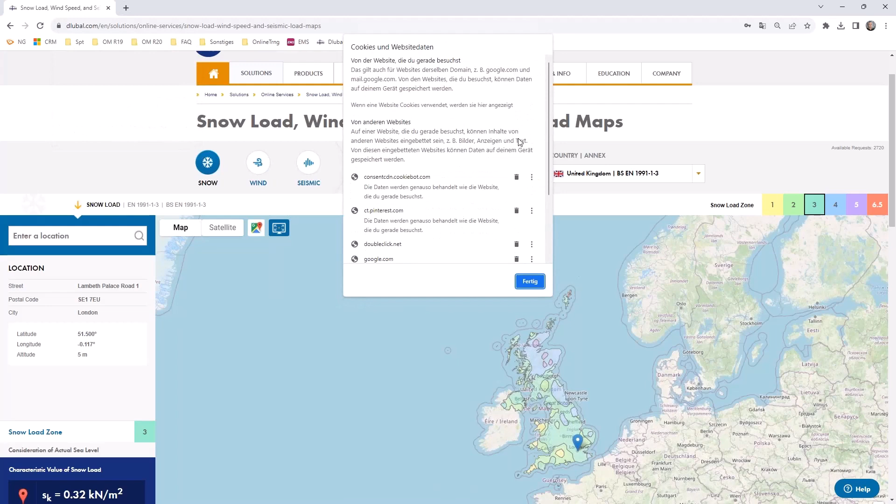This is data saved on the computer to quickly access a page, but it might be necessary to reload it. You can select to allow all cookies again, and then the frame should load again if it did not before.

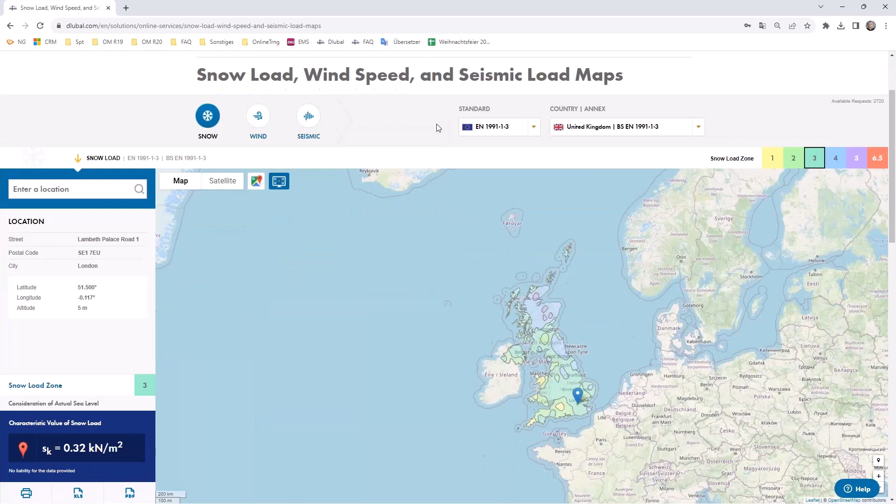Let me quickly sign in so I have enough requests for today, and let's go again to the snow load map. I think you're already coming to it. It is not available yet for every map - I do not think it's available for Great Britain. Oh, it is already. In my tests, it was not available.

We can use, for example, Great Britain with EN 1991-1-4. You see the small button on the left bottom of the page, which is still announced as being a beta. Please double check the values if they are correct, or do that in RFEM, or at least be suspicious if they might be correct. It's still in beta mode, but we do not want to not present it, so you can think about using them.

If you once click on the button, you can already see the three diagrams you can now gain. It's not only about the basic wind speed - you directly jump into the map and parameters according to the Eurocode, and it will create the diagram over a certain structure height.

If you would adjust to over 20 meters in here, you would see that the diagram will be adjusted, and you can also jump into the wind profile tab in order to copy paste the values with the level.

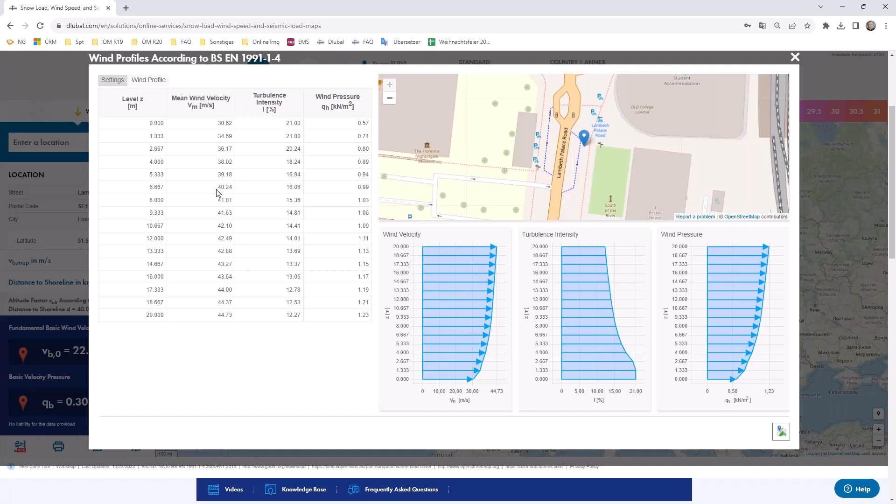This is then necessary if you jump into the RWIND main program, by the definition of the wind profile and turbulence intensity profile. You can also choose a user-defined definition and adjust all the values you see in here. You also get a closer look at the place where you are.

You can also switch off the map if you rather want only a big display of the diagrams. Just to remind you again, it's still in a beta phase, so it might not be available for every standard we provide, but this might be quite useful if you use RWIND without RFEM 6, or if you want to compare your hand calculations, or compare our calculations and tell us if something might be wrong or not.

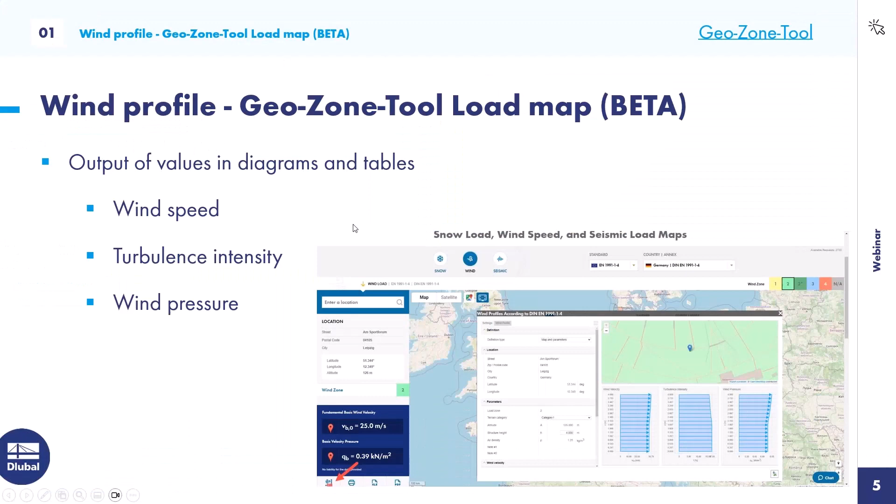So this was something not directly linked to RWIND. Let's now jump into the main part, of course, our program RWIND. This is my summary of the 4 features I would like to mention.

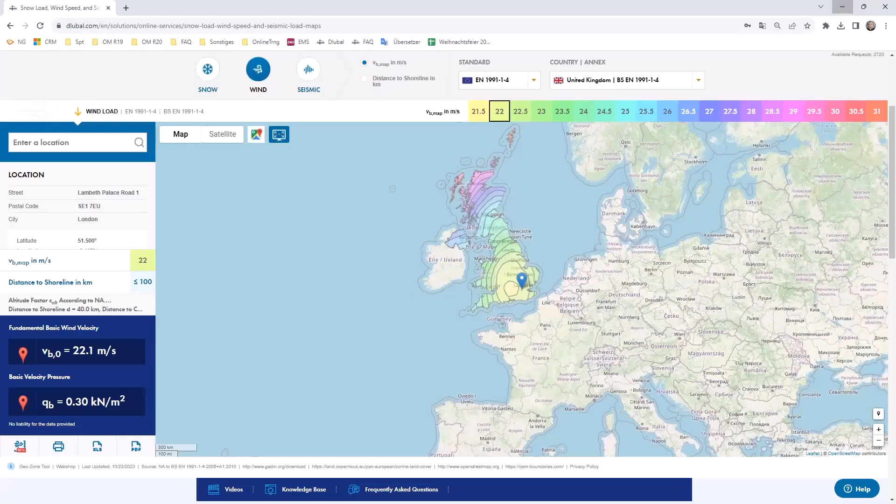What I would like to talk about now is the first feature: the generation of zones from RFEM surface numbers. The next one will be support for verification or experimental data - this will be the main part of today's webinar. The next is a new scaling function for the wind tunnel optimization, and last but not least, we will quickly step into the display of maximum and minimum values in each time step.

I have one slide for each feature, and then we jump into a small file in order to check where you can find it. So you are now able to generate zones directly from RFEM surface numbers.

Of course, only if you use RFEM 6 and then hand over the model to RWIND. We will now also hand over the surface numbering, and then you are able, in the edit part of RWIND, to generate zones from surface numbers.

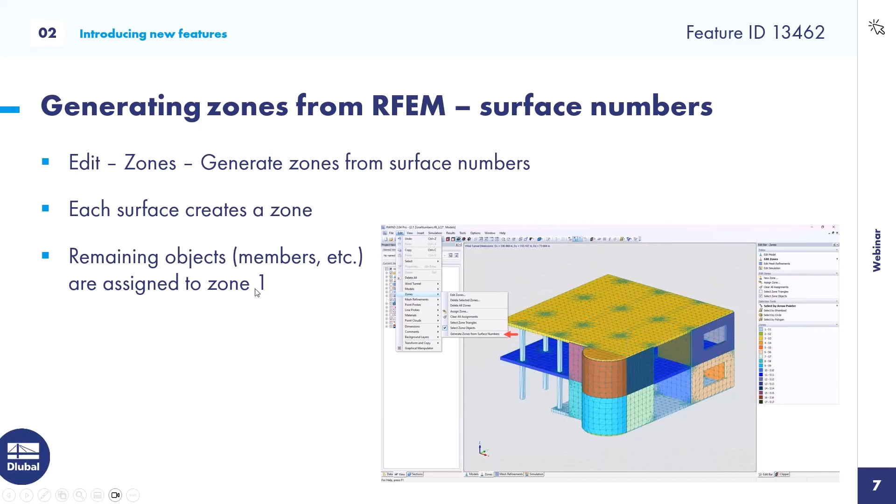So each surface you can of course split as much as you want in the RFEM main model will create a zone, and remaining objects - so you may also hand over members, they will also have triangles - will be assigned to zone 1. So that's a bit of a complication, that they are assigned to zone 1.

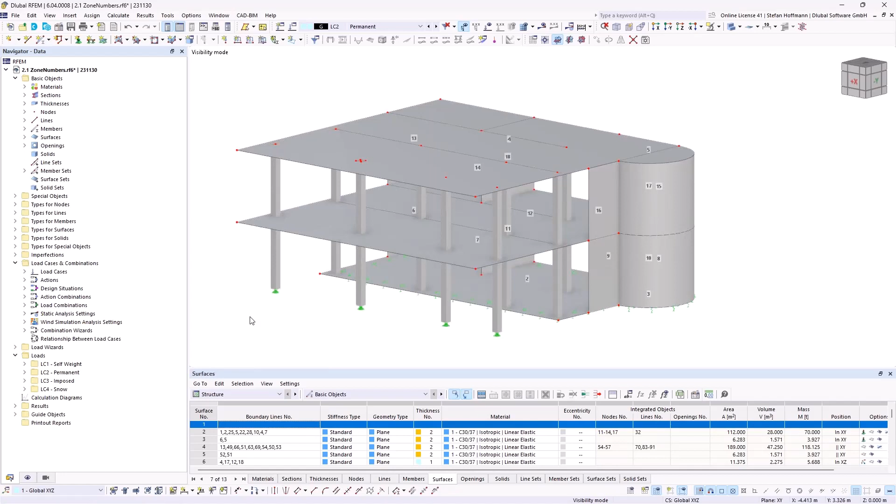But if we now step into my example file, which is also installed, it's the concrete building where I switched on the surface numbers. You can see that we have surface number 1. If you do not want surface 1 to also include the member triangles, you just have to go into the table and insert a row, so the surfaces will not start with 1, and everything else should be synchronized in the back. Now we have surface numbers starting at 2, and all other stuff may be handed over to zone 1. If this is not fine enough for your difference, we will see it later in the main example - you might also right-click and divide surfaces with intersecting lines to create multiple zones.

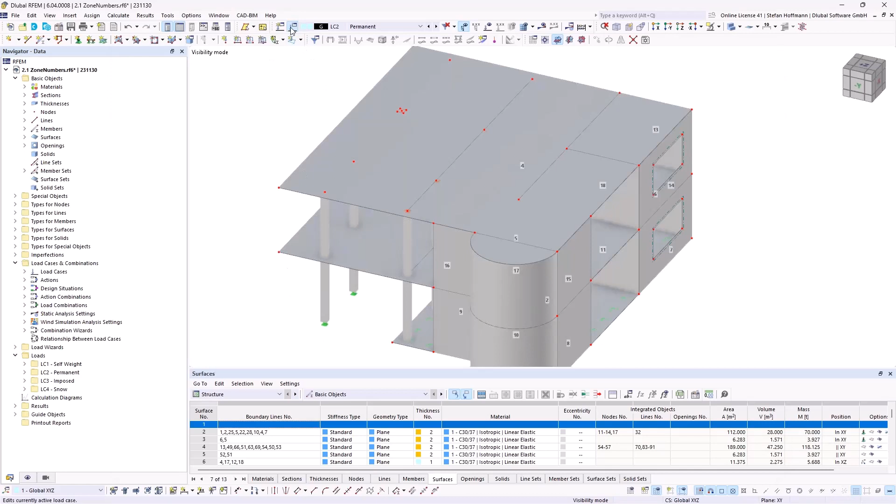So let's quickly create an example wind simulation load case. We will not care about any settings, what are available or necessary to be taken. We will just open our model in RWIND, which can be quickly done by the button I used. So our geometry is handed over, and now there would be only one default zone.

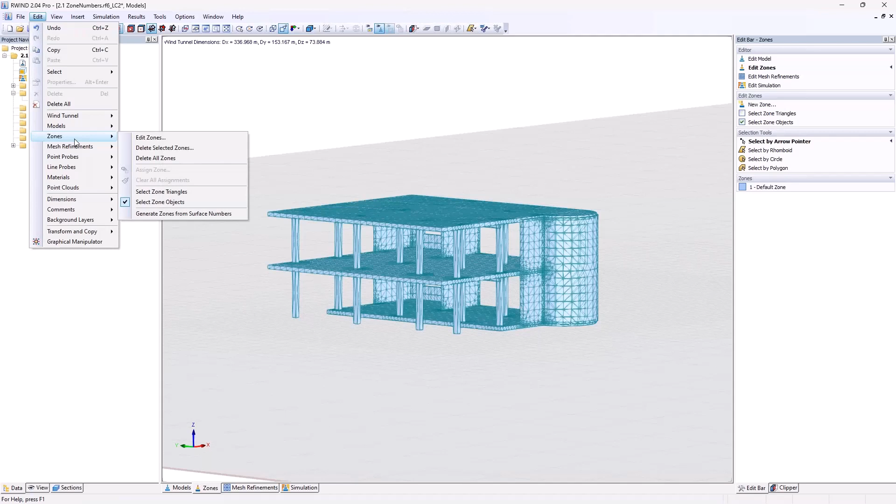So it is possible for you now to hit Edit, Zones, and generate zones from surface numbers. You quickly see that there are now a lot of zones created, and you do not have to do that manually - you don't have to create a new zone and use the selection tools to gather all the triangles which might be necessary for your file.

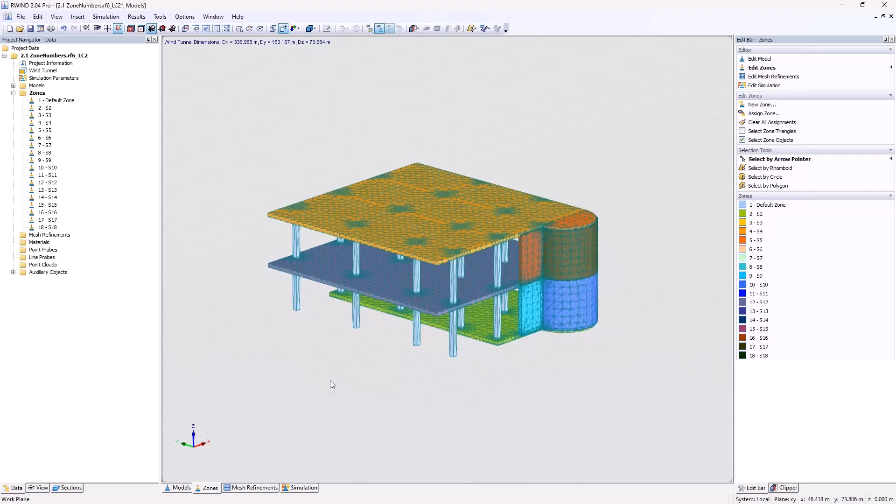If you already consider the surface numbers or a certain division in RFEM 6, you can already directly create these zones in order to quickly evaluate, maybe, normalized pressure over a certain zone. I will later show you how we use it on our monopitch roof. And as mentioned, you can see that there's also the default zone number 1, where you will be able to find every other stuff which is not related to a surface number.

Okay, so this was the first feature I wanted to talk about. We will use it later in the next example. So let's close everything and go back to my presentation.

So the next one is the support for verification and experimental data. We now offer you the possibility to enter verification data into the table. This is linked to point probes and pressure values, which you can enter. You can then display the data in graphs using labels, the normal point probe labels, but you can also do a graphical representation of the differences between the verification data and the simulation results.

You can switch that in the result navigator. You can also choose about the extrapolation of the data on the surfaces in RWIND using two methods, which are introduced and explained in the manual. And you can also restrict the verification data to be extrapolated to a certain zone. We will later use that in my main model.

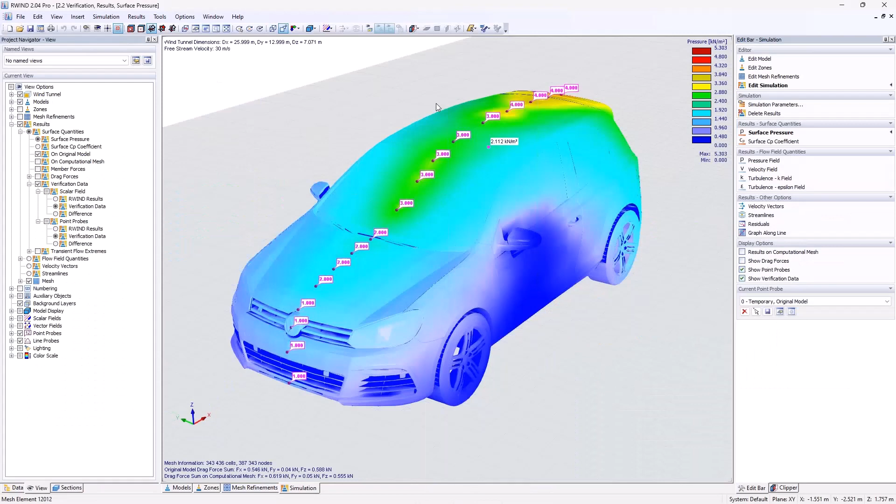But in order to introduce the verification data first, I use the Volkswagen Golf, which is an example already installed with RWIND. I have already defined a point probe and activated the option for it. It might be, of course, a bunch of probes you want to enter, if you want to define certain values for zones. We only did one point probe here, and if you activate the verification data, you will get one more table where I have entered random values.

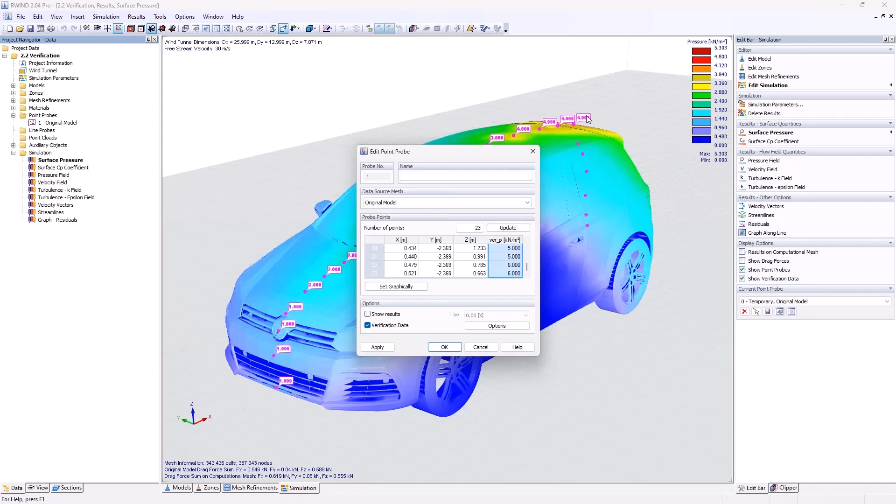So they do not come from any tests - I just wanted to show you the labels so you can quickly estimate where they are and what they are doing. Then you will also be able to adjust the verification data options.

So you can choose about the interpolation method, which is yet fixed to all point probes - you cannot yet differ between Gaussian interpolation or diffusion - but you may set a different data range constraint for certain zones. We will see that later in the other example. If you don't know about Gaussian interpolation or diffusion, you can just hit F1 on the keyboard, and usually it should be linked, but maybe we did not yet do this.

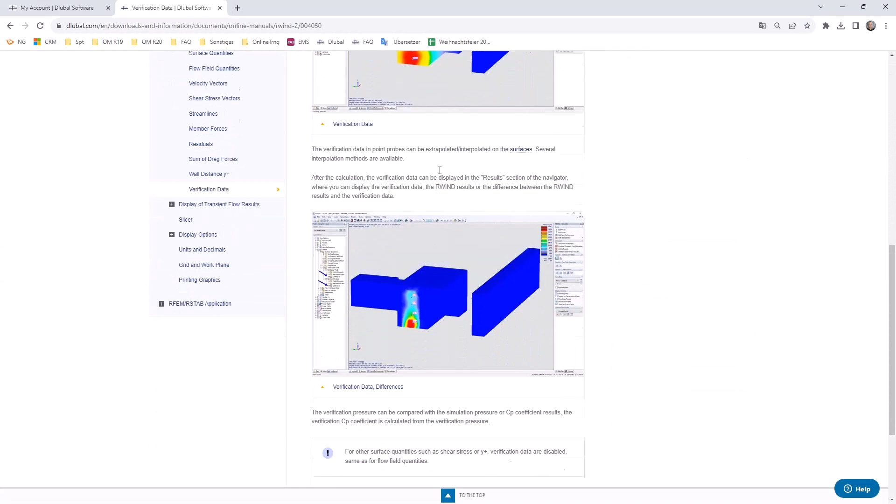So you can quickly search for verification, wait some seconds, and then choose the topic, which may be about verification data. So there is some general part of it.

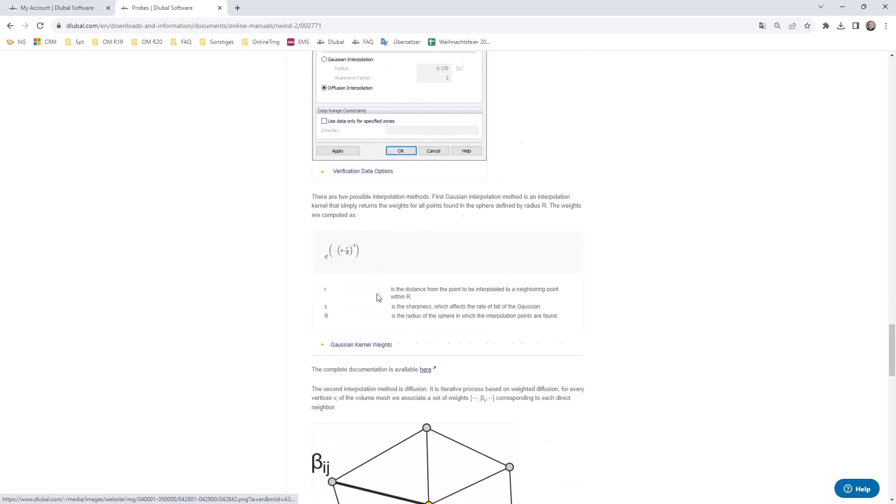If you go into the probes, you can search it and see the explanation about both interpolation methods. Just scroll down and you will find information about the second interpolation method, and about the others. We will not go into the theory behind it now.

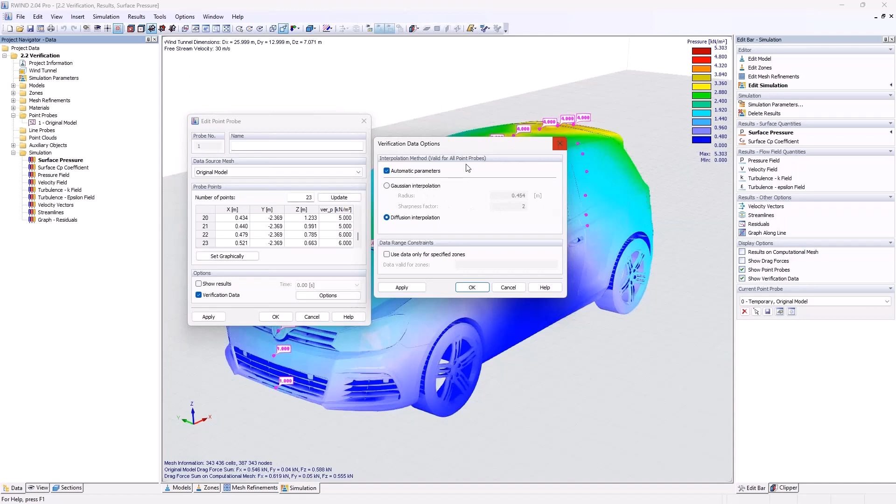What I do remember is that this will most likely diffuse interpolate about a whole area in slides, and with the Gaussian you can set a radius which will interpolate - but we will show that later on.

With these results, you can differ between the verification data of the scalar fields and the point probes. So you can step over and show the results from the numerical wind tunnel analysis, and then switch to the verification data. I think the biggest influence will be the difference, so you can directly check according to the colors how far our calculation may be away from the standard, which does not really mean it must be far from reality.

There's always the question: how can we verify our model? From my proposal, every FEA or CFD analysis needs to be verified by a wind tunnel experiment. Then you can enter the data and check if the assumptions in this complex CFD analysis match reality.

We will later on use that feature once again. So the next part is the new scaling function for the wind tunnel optimization.

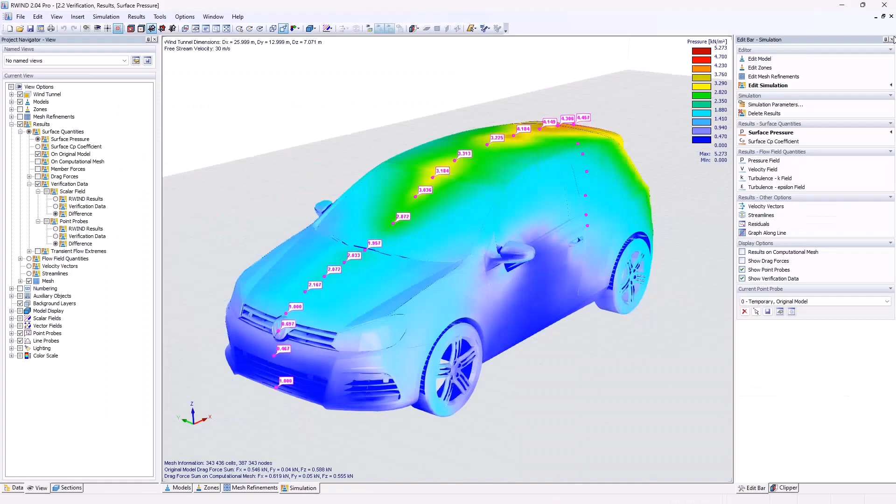You are now able to define scaling factors to automatically adjust the dimensions of the tunnel, and you will be able to save the user-defined scaling factors. Let's jump into the example, which is once again the Volkswagen Golf car. Then you usually double click on the wind tunnel - let's zoom out a bit.

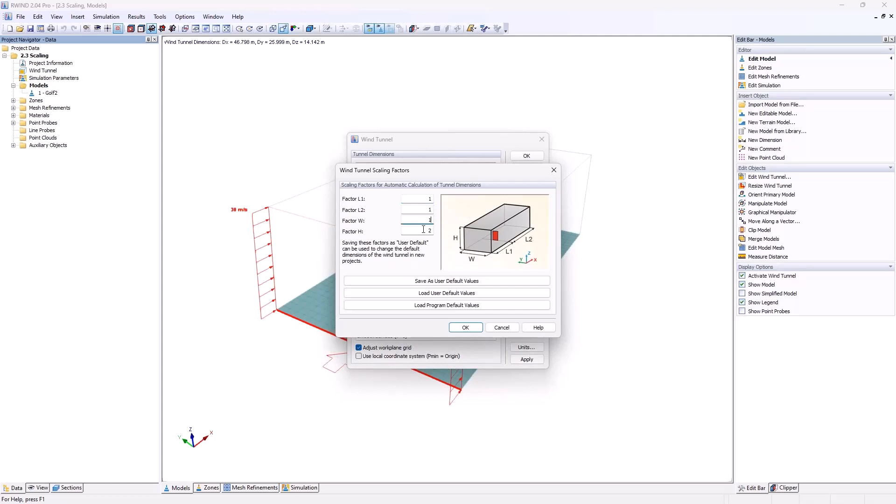See these automatically adjusted values. Then there is a button for the scaling factors where you can now define your own values. Usually it is multiplied with the normal values you have in the program. This is the wind tunnel the program will offer you.

But we propose, for a more detailed calculation, a recommended wind tunnel size. I already mentioned this technical article by Mr. Katsemian in a different webinar, but I'd like to put some effort into it again, because it's quite necessary to think about the dimensions.

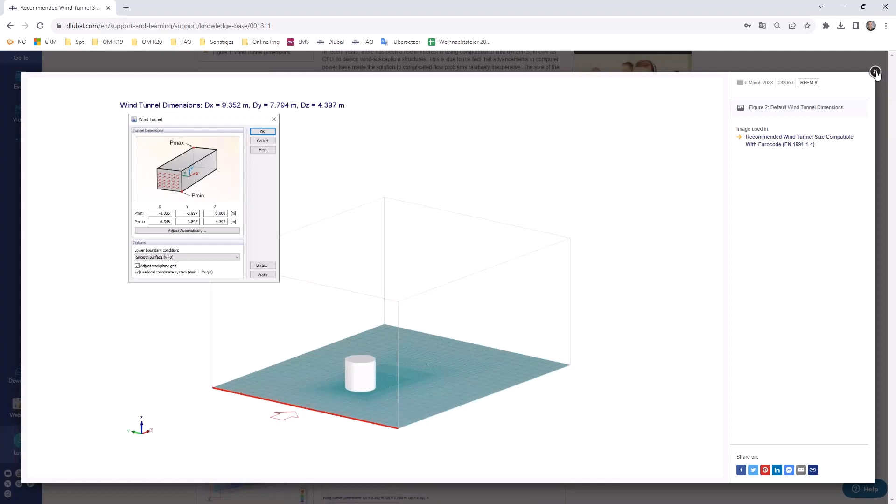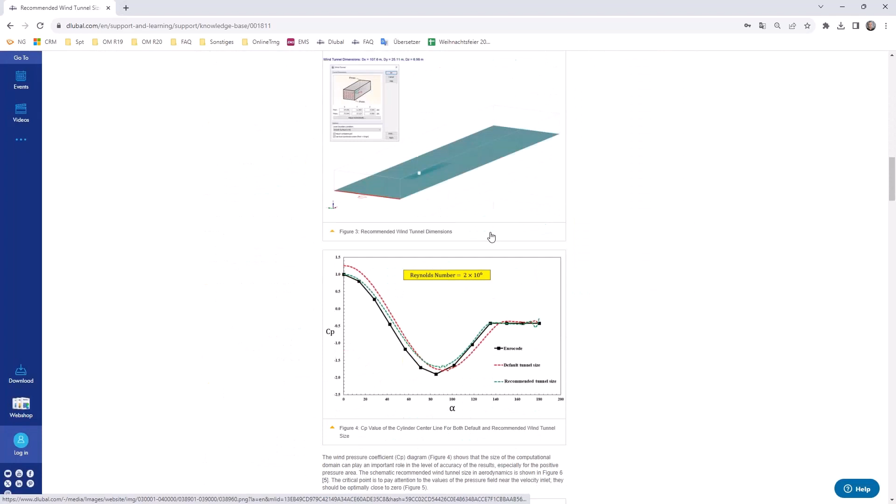If you compare the standard dimensions to get a quick estimate of the wind load pressure and the size we would recommend, this extends the calculation time a lot. If you want to compare values to the Eurocode, you can see that the size will be much bigger. I did a quick estimation of what the values should look like.

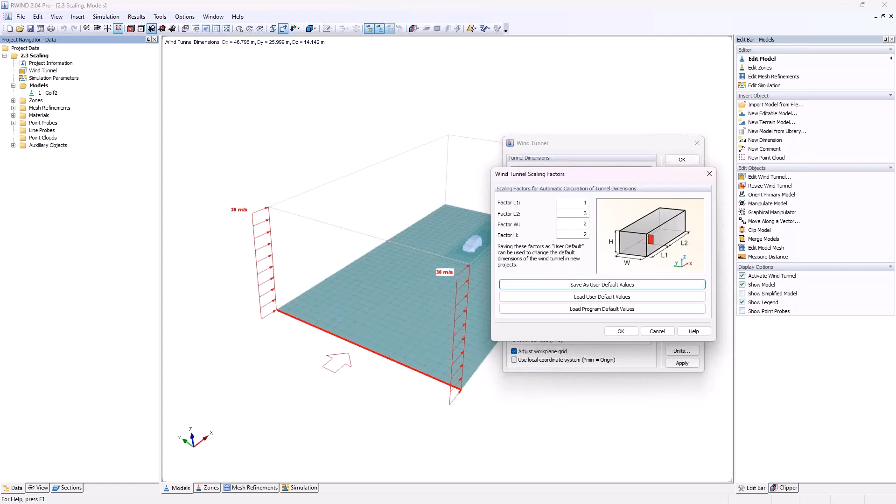If you would like to match the technical article - I don't like numbers with commas - it would be 2.7 in this length, 1.6 in this direction, and 1.85 in this direction. I would use 1, 3, 2, and 2, then hit OK.

You'll be informed that these are just the factors used, and you have to use the adjust automatically button. If you hit OK, you can see it did not change a lot, because I think it was already bigger in front. But your wind tunnel will be adjusted according to the factors you enter.

If you put 10 inside it, say OK, and adjust it, you can see that this factor is going to be increased a lot. This offers you the possibility to not think a lot about meter values, but to quickly enter your factors, save them, load them, and apply them on your model.

So the last feature I would like to present today is the display of the maximum and minimum values in each time step. This means it is for the transient calculation, limited to our RWIND 2 Pro version. It will offer you some kind of envelope for surface pressure or CP coefficient values.

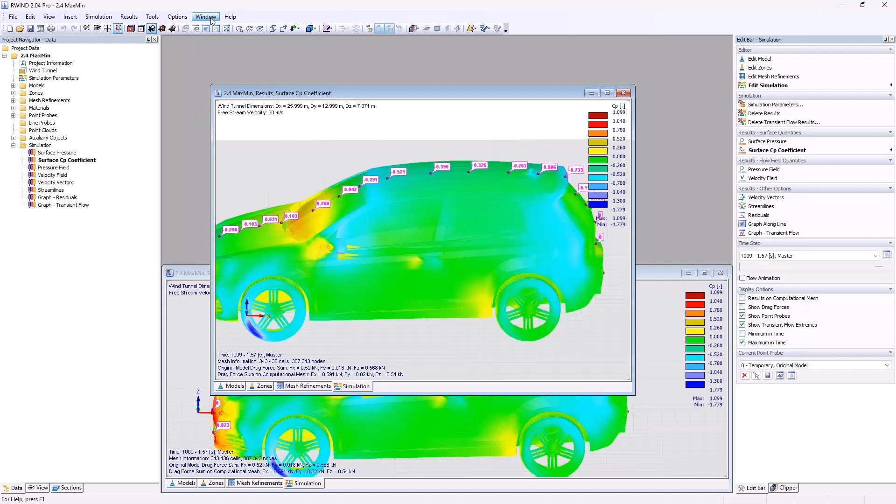So let's jump once again to the golf car. There's also a transient calculation file for the golf car. Usually if you do not show the transient flow results, you will have a slider over time where we can see, most likely on the back part of the car, that the pressure will change over time due to the wind acting, turbulently of course.

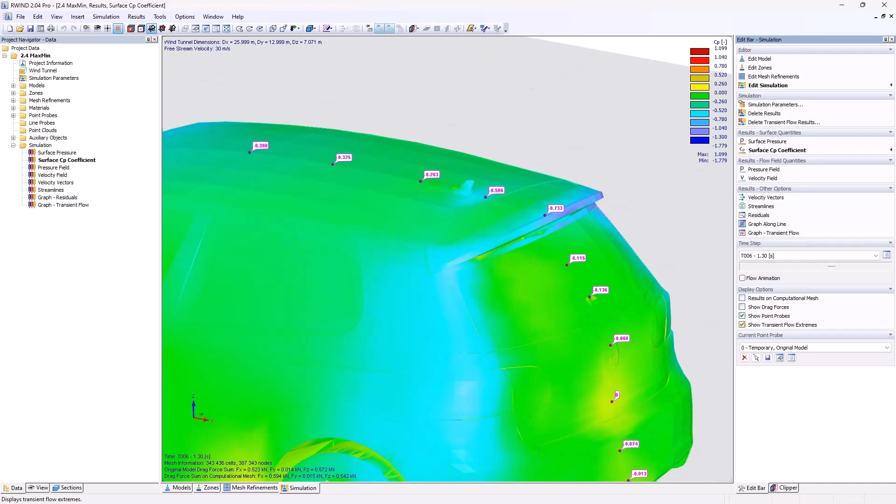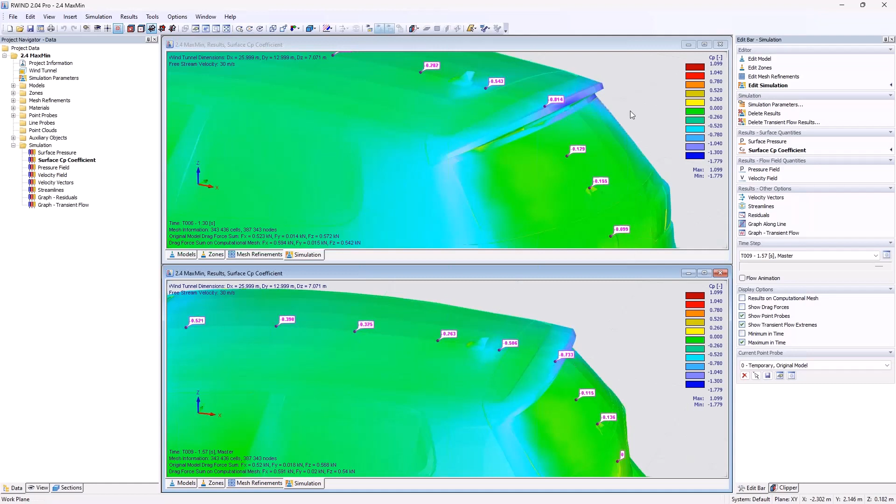Then it would be kind of hard to evaluate where the maximum suction or maximum pressure will be. Or if you are lazy and don't want to check that, you can now show the transient flow extremes. If we use 2 monitors, we can show the minimum in time, which might be minus 0.814 - the minimum with a minus. We can also choose to show the maximum in time. So this same point probe in a transient calculation over time would gain the values of minus 0.733 or minus 0.814. This is one way to determine the maximum or minimum values for your structure or your file.

You can, of course, also switch that value in the view navigator, but I think the quickest way is to do it on the right.

Okay, so this was kind of a slide presentation, but also stepping into the program. Now I would like to show you how we can use the feature of the verification data on an example. It's a building, 10 meters long, 8 meters wide, 4 meters high, and it has an angle of the roof of about 5 degrees.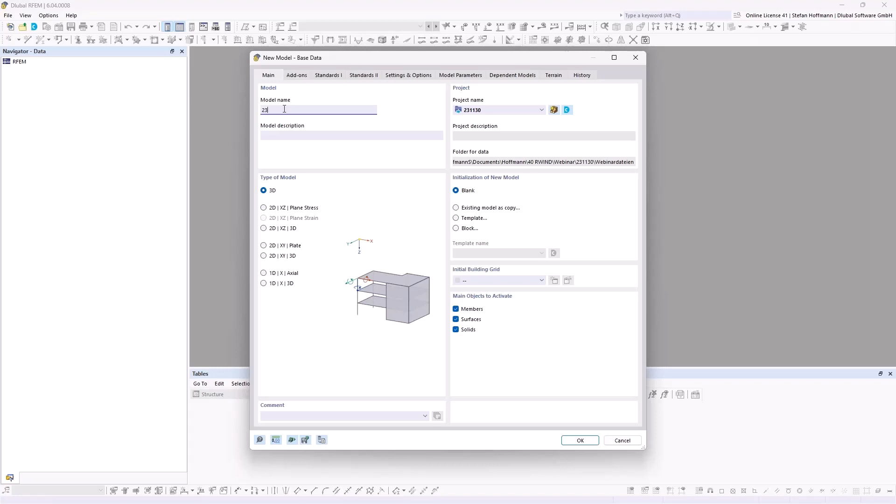So we will start with a fresh model in RFEM 6. Let's give it a name - the name of today, and it's called monopitch.

What we need to activate - we will not do any design to elements, so it's just really about giving our model into the wind simulation analysis and gaining the pressures of it. I will only activate wind simulation. I could activate all because I'm working for Dlubal, so I'm not limited to any add-on, thanks to that. We will do it according to the German national annex, because we are quite used to doing so, and we also tend to present our English webinar for the German annex.

What you can now also do is choose a location already in the Geo-Zone tool if you want to - we will do that later on. You could also define a terrain. Just remember, it is possible, but since we would not like to have any influence by neighborhood or by the terrain, we just skip that.

So once the file is loaded with all the data used before, remember that the first angle of wind simulation load is going into the global X direction. So I tend to rotate my model because I dislike to rotate the wind load.

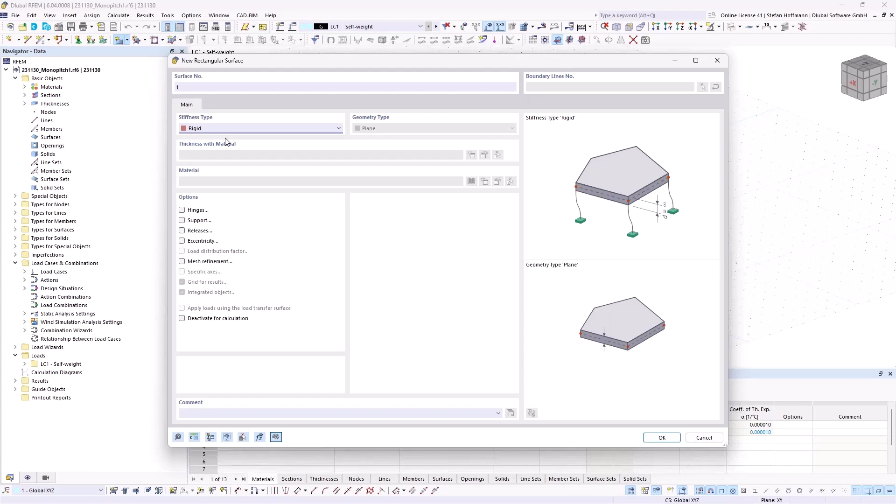And I will now start by modeling the bottom plate. I will simply use the rigid type because I'm only interested in my wind load on the structure, not in any design yet for the building. So it does not matter if it's concrete or metal - we can just use rigid because I do not account for any stiffness.

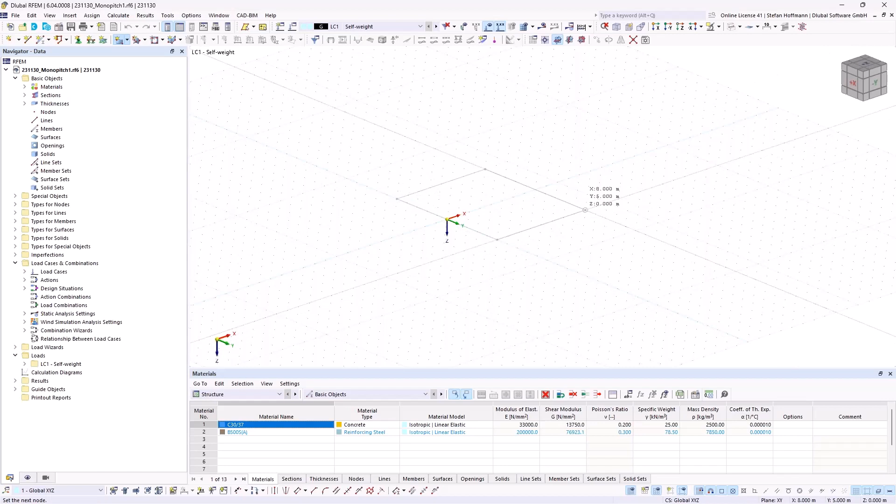So now it is 10 meters times 8 meters. We would now need to define this size in our program. Where did I choose it? I'm starting at minus 5 and we're going to 5 and 8. So this will be the bottom plate.

Then we can simply, with the control key on the keyboard, mark all the lines, hit right click on them and extrude them into surfaces. This will offer you the possibility to quickly model a surface.

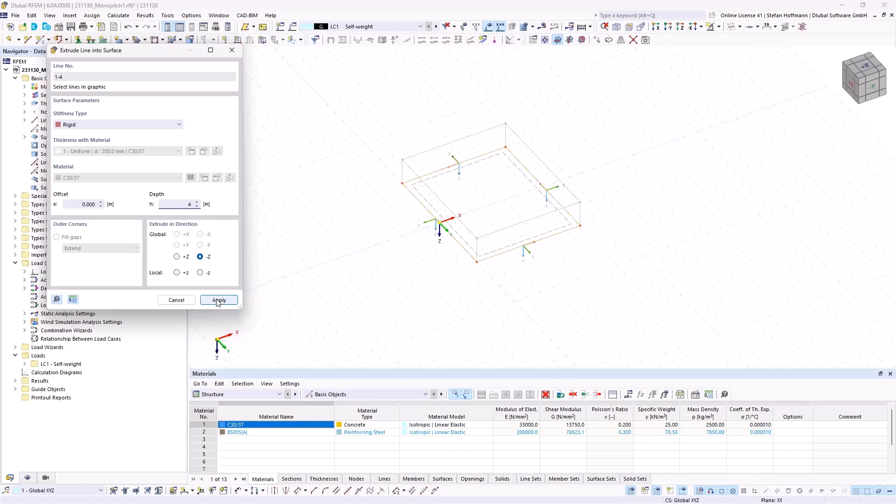We will once again use the rigid type, and the height should be 4 meters into minus z. Okay, we apply that, so we most likely already have our hull. You can of course switch into this display if you like it even more.

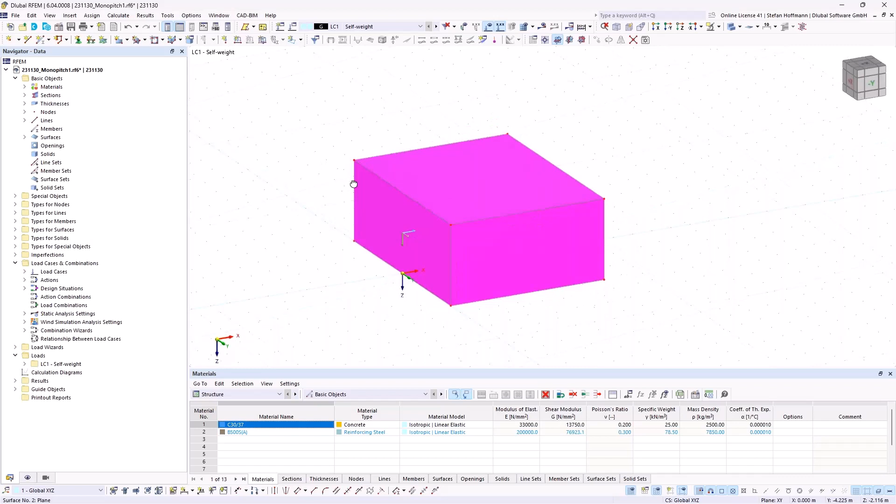And then I would just mark my bottom surface and copy paste it with the control keyboard and snap it to the top. We of course need some boundary conditions at least, so I would just apply some line supports, being some singular foundation on the length. And then it's of course about defining the angle.

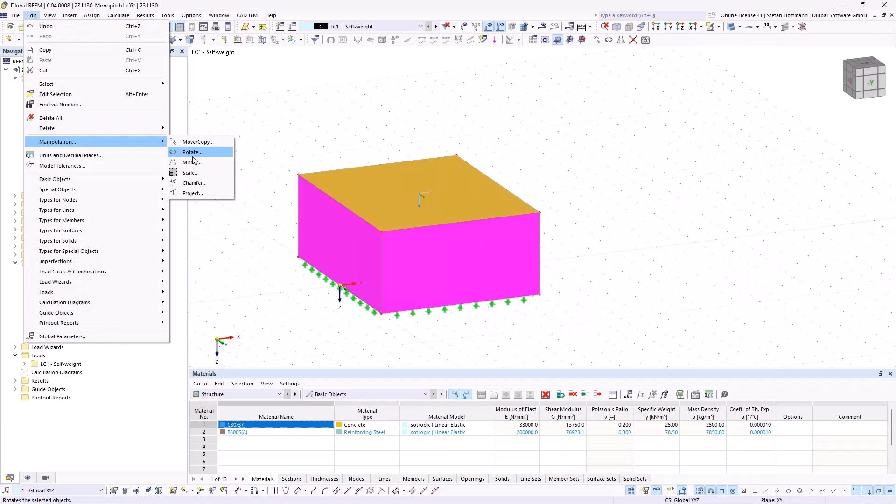You can quickly do that by simply hitting the surface and using the manipulation tool to rotate it. So you can now decide that you want to rotate it, for example, 5 degrees. Due to our wind load assistant, I use 5.01. And then we need, of course, to think about what will be the direction.

So it is about our y-axis, and this is the turning point. It should be into the z direction, so we want to have it into the global z direction. Since we use this point already, you don't need to choose it, but we can of course choose a node in here. And if we hit OK, it is moved.

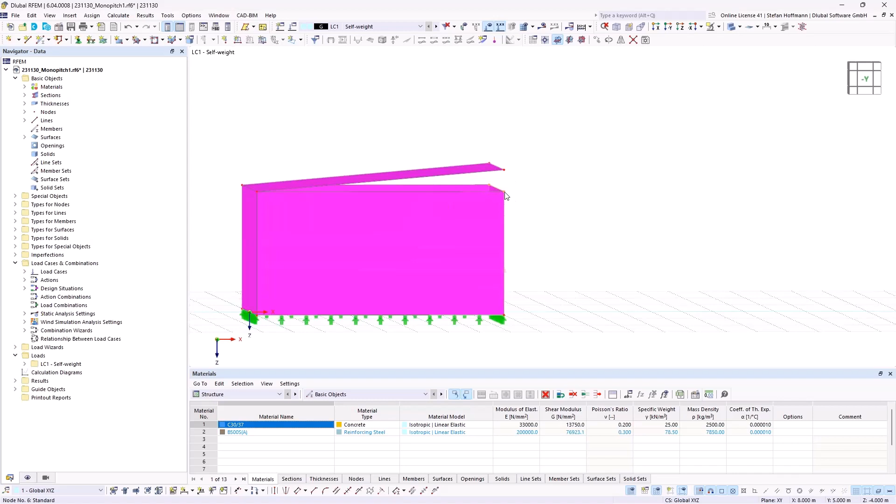Since I only selected the surface, all other combined elements are not moved. So we could simply mark everything before, or we now just mark both nodes and drag and drop them to this position. Then you can see that the surfaces are quickly adjusted. So it's quite smart if you would like to model close to a CAD design, I think, that you can use drag and drop and so on.

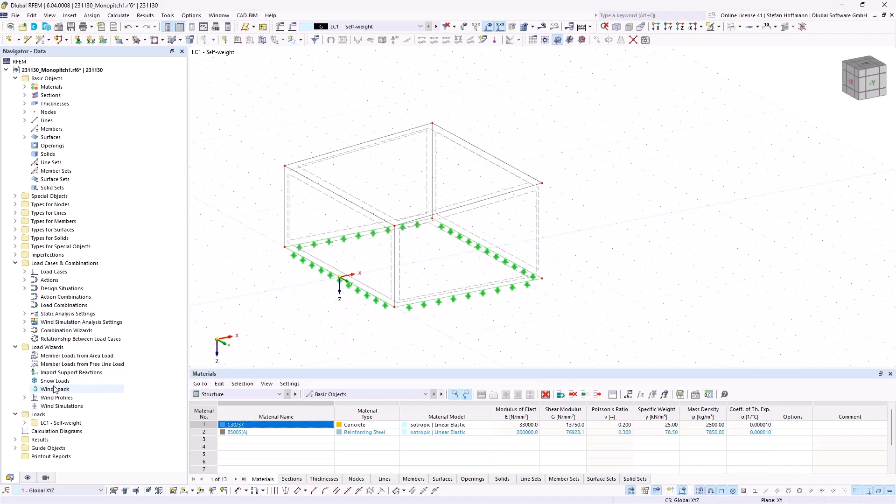So the next thing we would like to do is, of course, to check the wind load areas. We can do that with the wind load wizard. This is not RWIND, this would be the standard approach. And we are now only interested in the mono pitch roof.

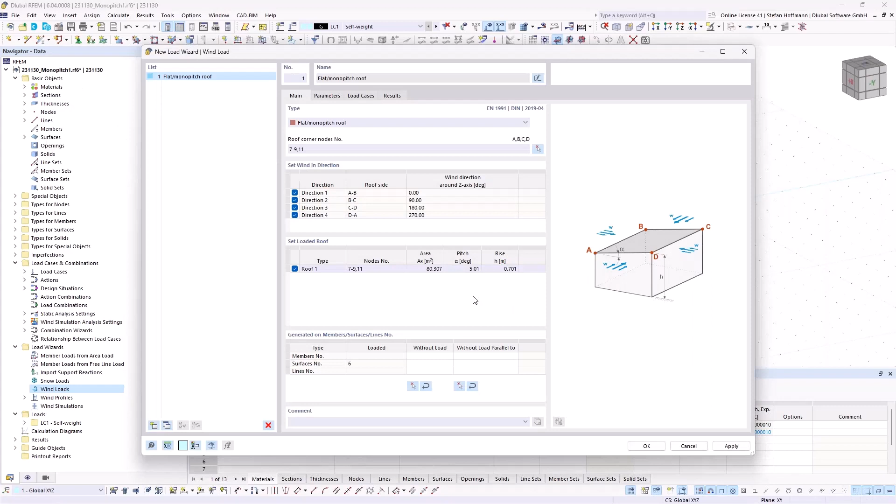And then you see the picture, what 4 corner nodes you need to choose. So we simply pick our 4 corner nodes and hit OK. And then we introduce the parameters.

So now I hit the button to jump into the Geo-Zone tool, and I will use the location of Leipzig. It does not matter where we are. You can see that the German standard will choose the wind zone 2. I will load all the data.

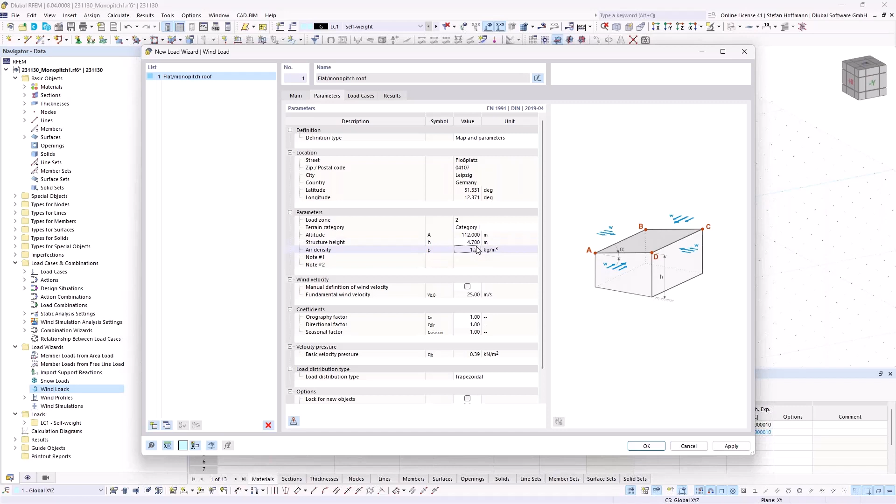It will gather all information from the Geo-Zone tool, so we do not need to enter it manually. And then I can adjust the structure height, which is roughly 4.7 meters, and we will use terrain category 2. If we do that and create all the wind load cases, we can quickly estimate the results already.

So you see the load directions, and you see that our zones will be split. If we jump quickly back into this part, we will be given all the data the standard will give us. So the width of zone F, so E divided by 4, is 2.35 meters, and E divided by 10 is 94 centimeters. So you will be given this information.

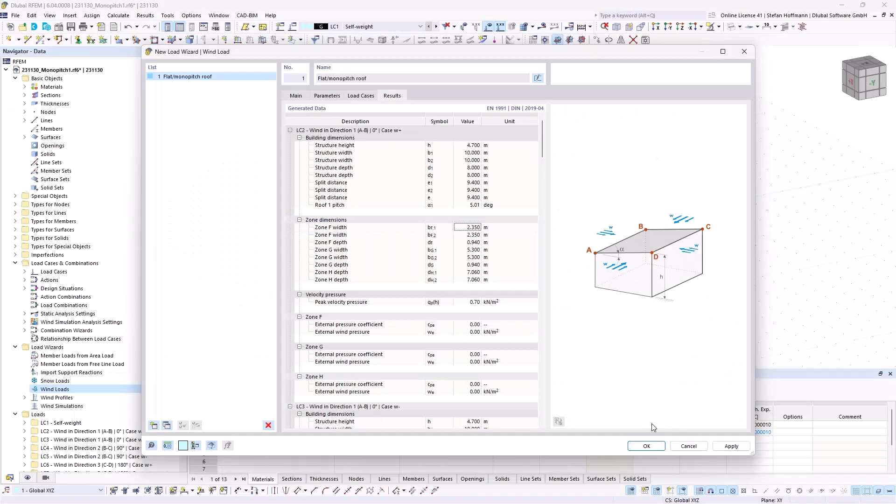This is why we do it as well, shortly, with the load assistant. And if you display it, you can see that this is the load or the suction we are going to experience in our wind, and we will then check it.

So let's continue. What we now want to do is define zones. So we would like to split the roof into parts. For that, we would like to have our lines showing into the same direction.

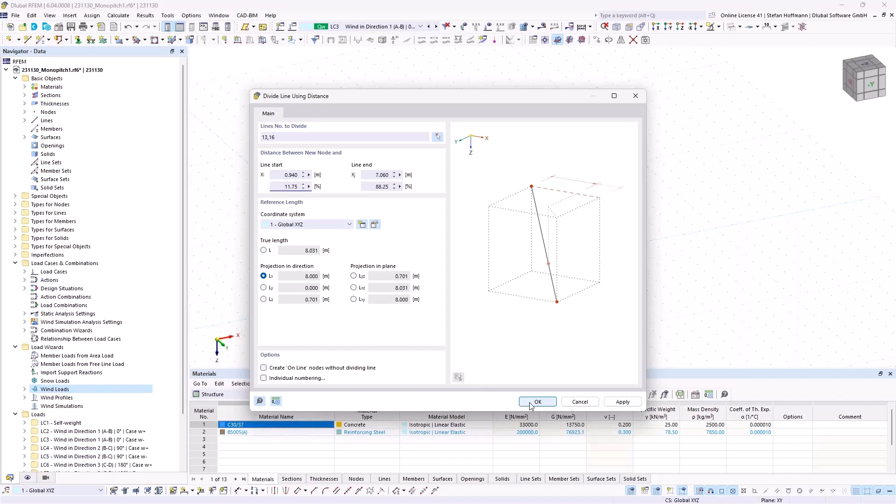So now we can use both lines, hit the right mouse button, and divide the line via distance. So now we could just simply enter 94 centimeters, but it is meant as a projection showing from top. So you are now able to use the projection of the line into the local X direction. You can enter 94 centimeters in here. And if you do that and hit OK, you can quickly divide the line, using it for further modeling.

We will now simply draw a line into here and have the line which is going through, and then I told that the distance will be 2.35 meters.

So we will use this line and also divide it with a distance. It's not about the projection or anything, since it is the same if we use it, and split the line at 2.35 meters. We will also divide the line at the distance at the end, 2.35 meters.

So if we now have it, we can simply mark this node and copy it from this point to this point in order to have it. Or you can, of course, also try to hit the tool in order to snap the perpendicular part. I'm not sure if I activated it, so I'll just use this line and copy paste it on over here.

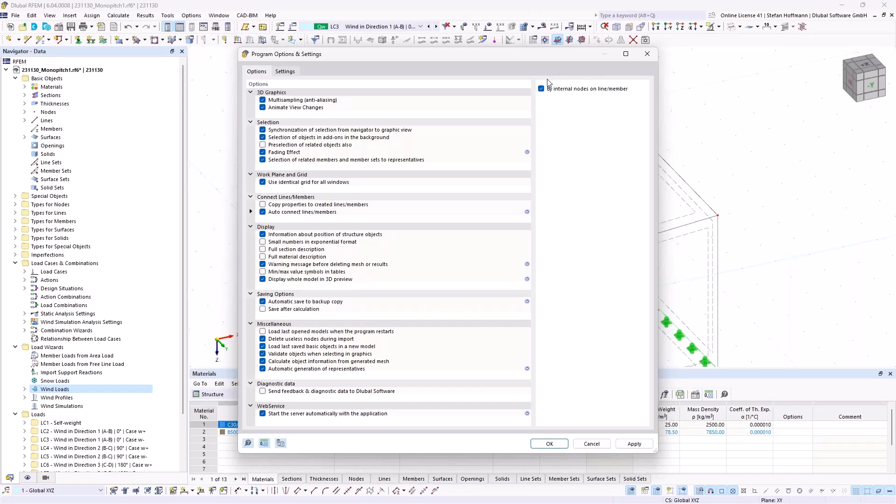If you are curious why red or blue nodes are created, so if the line divides or not, you can step into the program options and choose the setting for what it is supposed to connect, members or lines. If you do not manage to do so, you can later on use this function and check if the lines will be divided.

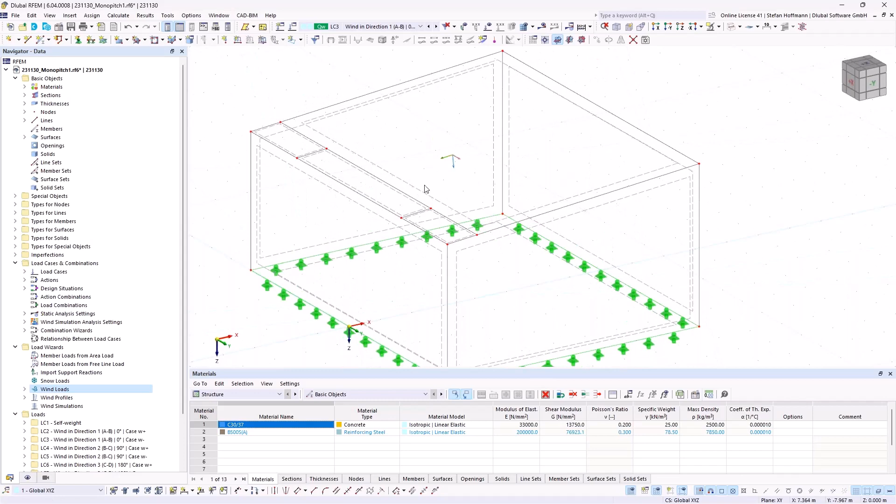So the last part we need to do in order to have certain surfaces is to right-click on the roof and divide the surface with intersecting lines. And voila, we now have 4 surfaces for the top, which will give us 4 zones as expected, and what we would like to do in order to compare it with our experimental data.

So this is a way, this is one possible way. If you have a quicker one, of course, you can also use your way of modeling.

Next we need to step into the mesh settings for the wind analysis in order to check what wind simulation options we would like to use. So you can think about the level of detail or the simplification of the model, and whether only visible objects should be handed over. Since we do not have members, we can just deactivate this option.

We will also not hand over any terrain. We will also not hand over any surrounding models. Let me shortly drink something. And we will also not keep the wind simulation results.

Since we use rigid surfaces, we do not need to think about surface thickness. Run RWIND in silent mode is mainly supposed for when you have a lot of load cases and you do not want to double check them and manually start the calculation in RWIND.

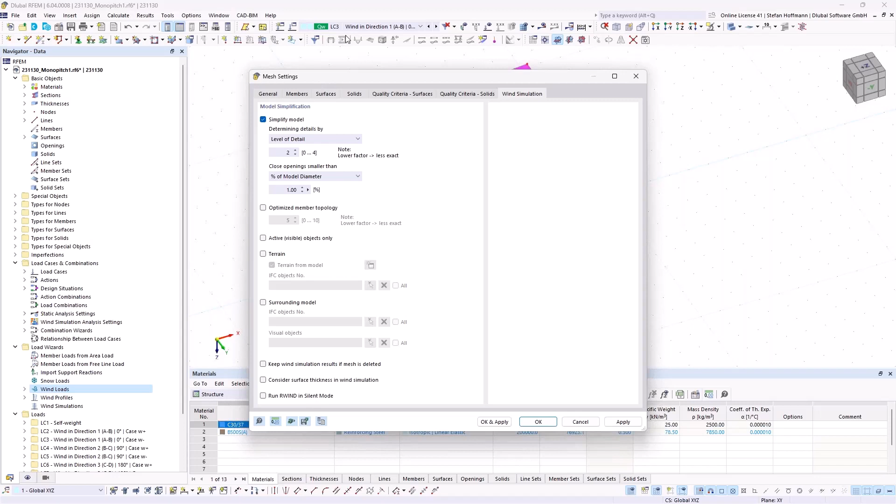You can disable this button, and once you calculate a wind load case, RWIND will open and you will be given the option to adjust everything you would like, so you can double check the model and then start the wind calculation on your own.

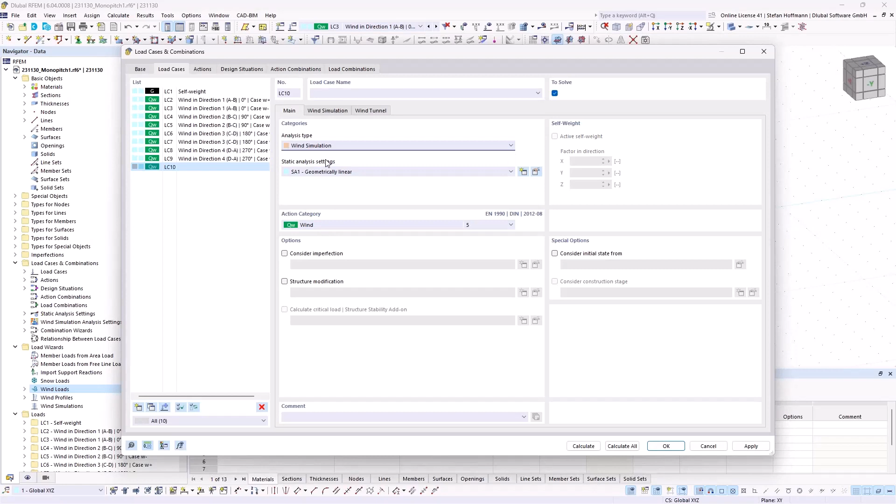The next part is that we need a new load case, of course. So it will be the action category wind, and it has to be the analysis type wind simulation. Then two registers will open on the top, where you can choose further settings for the wind simulation. The first one would be the wind profile.

If we step into it, you can see that this is, of course, once again related to a certain destination. So we check Leipzig again in order to load the data inside it. You can also manually define it if you want to.

We would just change to category 2. The height is taken automatically by the program, and we will not adjust any other factor inside this. There you can already see the profile, which should match the ones I showed in the beta phase. But due to the beta phase, there might still be some adjustments.

Using this button, you can switch between the turbulence and the wind profile, and you would also be able to see the wind velocity given in the tables.

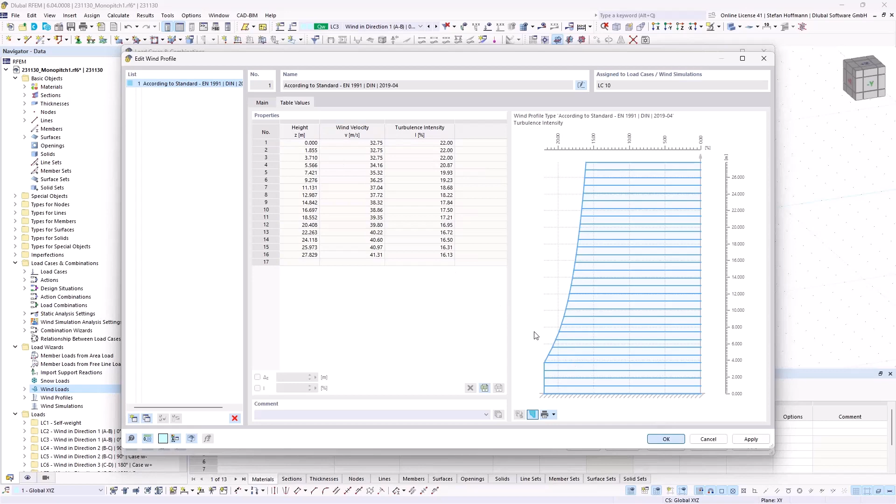If we defined it, the last part would be to double check the wind simulation analysis settings. So if you would like to do a basic steady flow calculation or a pro transient flow calculation, this is always up to the structure and turbulence you are expecting. We will simply do a steady flow calculation.

We will use the presets given over here. And if it is up to certain controlling standards, we would propose to also activate the boundary layers. But for this, please check out our technical articles, because Mr...

RWIND did provide a lot of verification examples and also a lot of nice-to-know facts for maybe beginners in a CFD analysis, because we offer a tool with a quick estimation of results. And there are still technical parts behind it that you may be curious to know about.

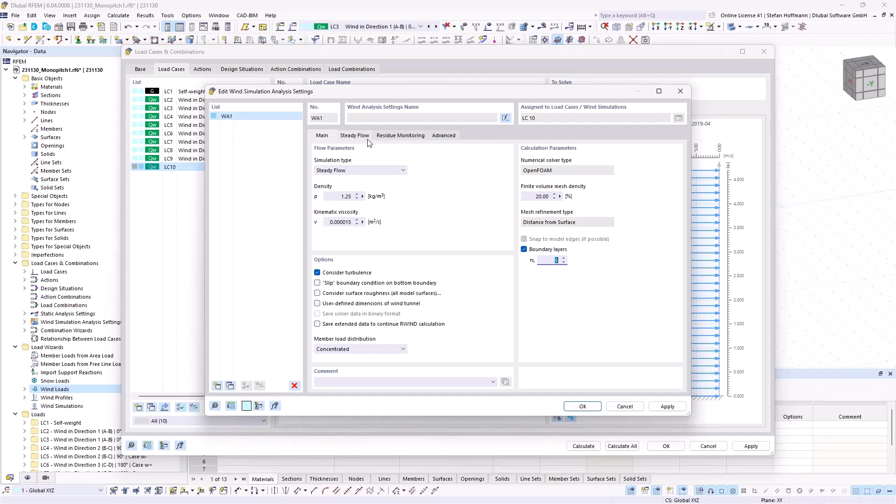There are other things you could adjust, but we will just leave it as it is. So if we would now hit OK and start the calculation of LC10, you will see that it will now hand over our model to RWIND. It will start RWIND, and we would now be able to do the stuff we would like to do.

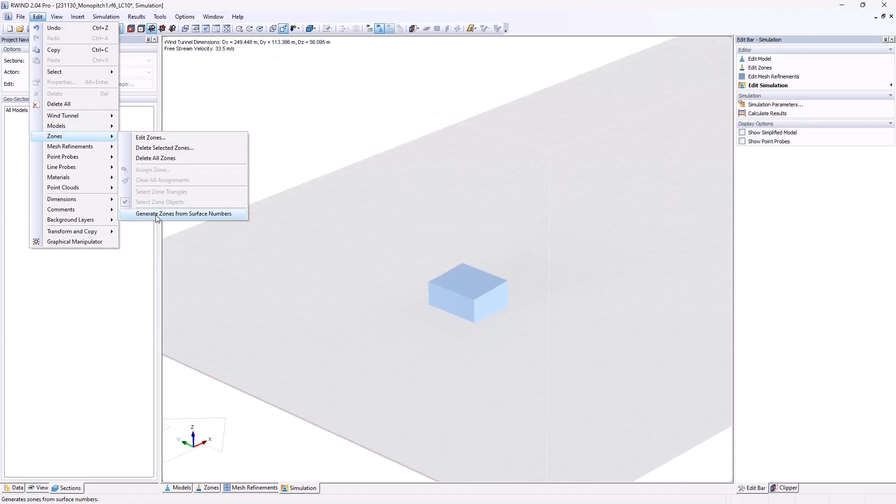So currently it would be necessary to manually generate zones from surface numbers that you can later on use. Of course, we are planning that there should be some automatic option, because usually it might be wanted that you would like to automatically create zones.

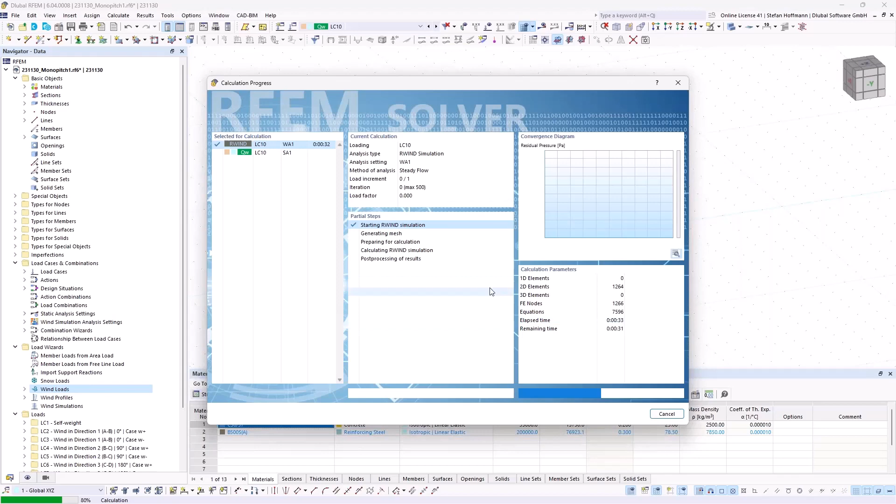If everything is done, we could now start the calculation, but since this will take 5 to 10 minutes, even for this file, I will not do it in this file. I will open my already calculated file. So of course, RFEM will give me some error. Okay, I did already run the file for you.

So let's make a jump in time. 10 minutes passed, and we now have already our results on the model. Let me quickly just delete the line probe I already defined. So we have already our zones defined as well.

So our zones - I always have to double check - Zone 7 is the big part H, 8 and 9 is F, and 10 is G. I hope I will remember it. If not, I will have to double check it again.

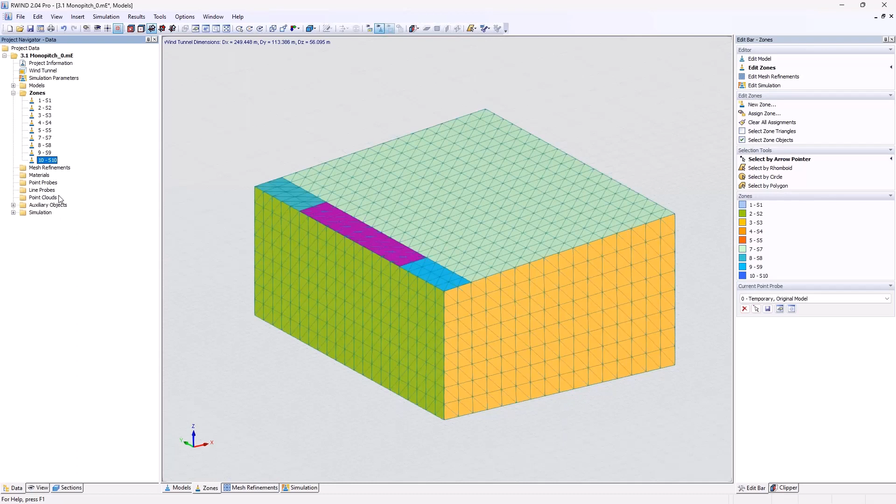So what we are given now after the calculation is, of course, the pressure for our front and our roof, sides, and so on, with certain values. And now if you would like to compare that to different standards or to your own analysis, we will define a new probe.

I will name it F for the zone F, so this will be these small parts in our model. And then we will define it on the original model. If you are curious about what the model measures are about, there is a big chapter in our online manual covering this.

Because this is one main part of RWIND - that we give maybe a non-topological correct model from RFEM to RWIND. It will create a fine mesh for the CFD analysis and transfer back the forces onto the model. So let's start by setting point probes graphically.

So we are now only interested in the roof, so part F. I will use 2 probes over here, you will see them soon. I hit finish, and then I will quickly switch to the RWIND results, because it was still set that we show the verification data.

And then we can see that we have those 2 point probes giving the results at this point for our zone. And if we now would like to introduce verification data, we just apply this button and we will check what the standard is thinking of.

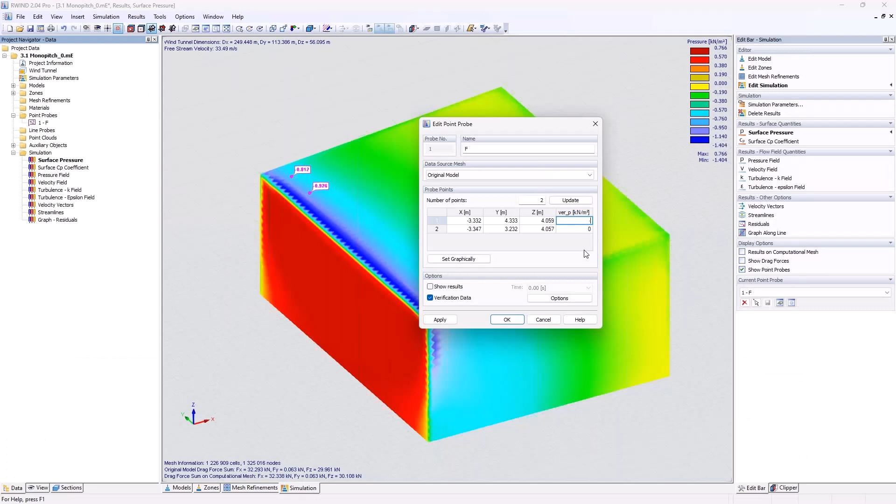So it's minus 1.19 kilonewton per square meter. Let's enter minus 1.19. And quickly check that this will only be used now for zone number 8.

And let's use the diffusion interpolation, say okay, and let's quickly switch the data to the verification data, because I think this is a smart way to see what the logic is doing behind it if you enter these probes.

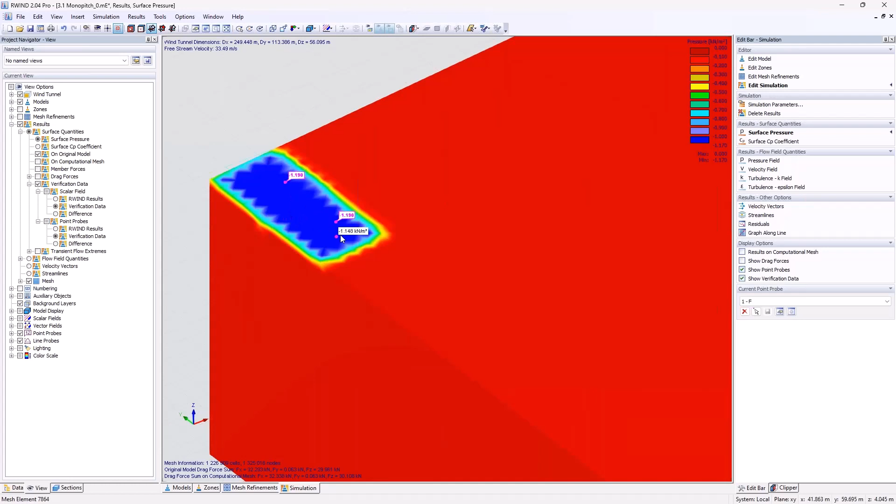We now inserted 2 probes for the zone. We restricted it to be only interpolated in this area. So what it tries now to do is keep the minus 1.19, and toward the boundaries, to the other surfaces, it tries to interpolate.

We will now introduce some more points. So I will just enter one more in the other area, say okay. We go in there, it already has the latest value.

And if we would switch now to the Gaussian interpolation with a radius of 0.72, hit apply. Okay, let's put this window in here. We will see that nothing is done in here - keep in mind, we restricted it currently to 8.

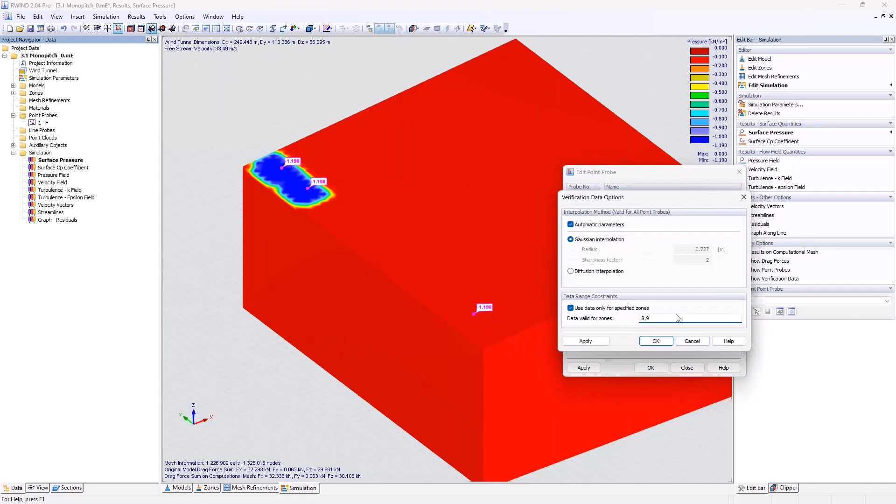We can also restrict it to 8 and 9, and then we see that the interpolation is done in a bit different way compared to the diffusion. So diffusion is using a wider area, and Gaussian is using the automatic parameter defined here.

So it's a radius around the dot of 73 centimeters. We could also uncheck the button and increase the area or decrease the area. So it depends on how many probes you would like to set.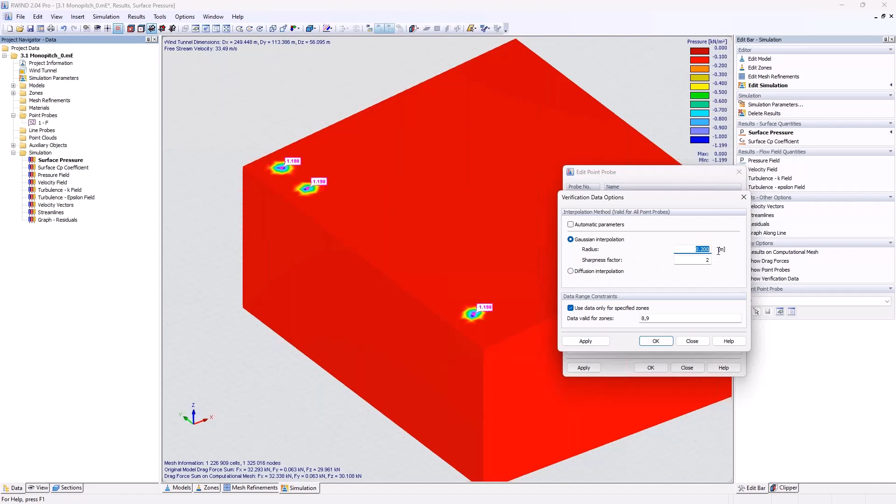In a normal wind tunnel analysis, in reality you have a certain amount of probes over the height. Since this would most likely extend my webinar to more hours to introduce such an amount of probes, we will only use 1 probe this time, and we will simply increase the radius, for example to 3 meters, because this way most of the zone will be covered by my defined verification data, and all the other stuff will then be interpolated. So we will set a new probe for the next area.

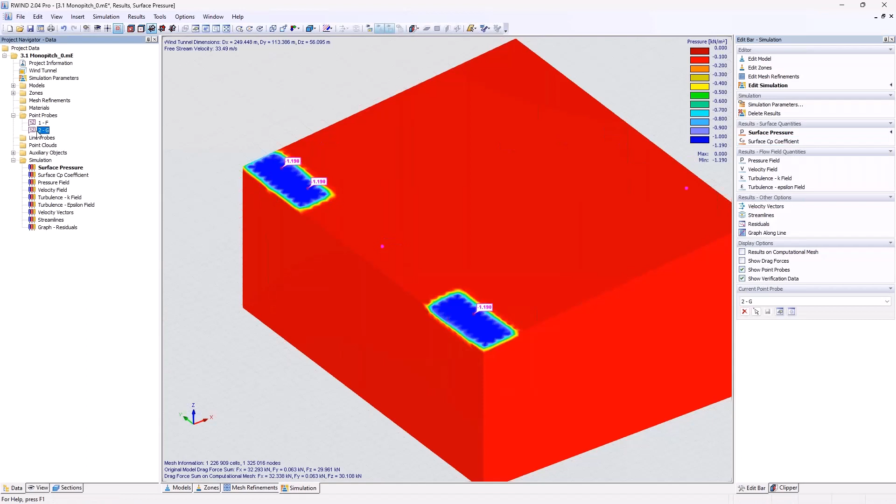So this would be G. We will set it graphically. So we will once again only use 1 dot. It will be more usually. So I set by mistake 2, so let's only keep the first one we used. You can also later adjust the values we used in here if you need to do so.

And we will now once again define the verification data for this part. So let's jump back, should be minus 0.84 according to the standard. So let's enter it. As you can see, this part on top is limited for all probes, and we will define this probe only for part number 10. Then you can see that it will also interpolate between the zones a bit better than before. So now we have already defined 2 parts.

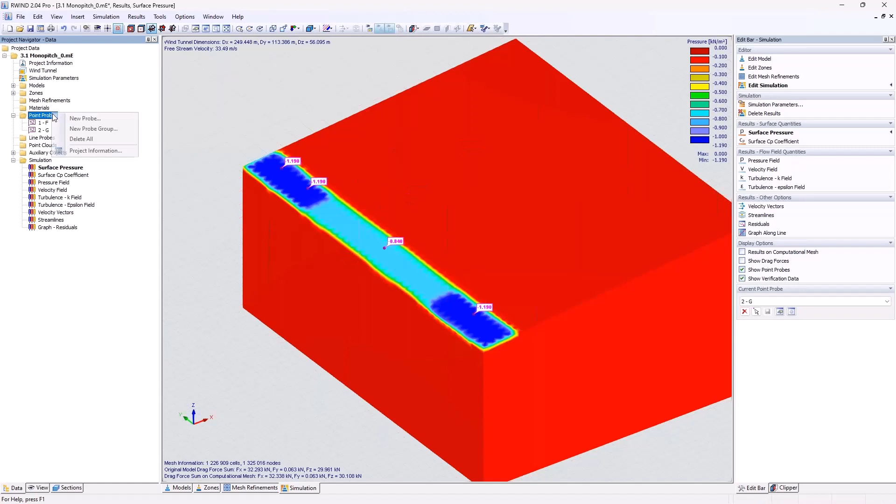So let's enter our last probe, which would be about the H area. Once again, I only set 1 probe over there. We define the verification data, what is supposed to have minus 0.84... 42, sorry. And we assign it only for zone number 7.

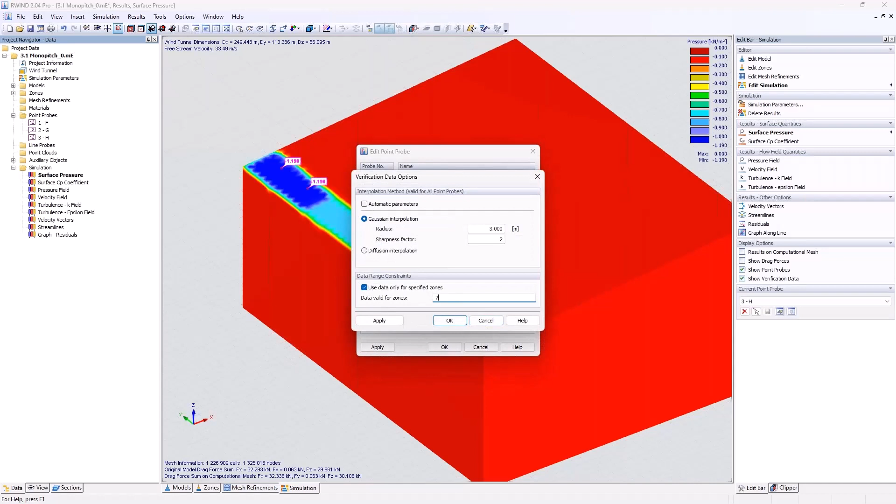If we hit apply, we can see that our radius is, of course, since the zone is about 7 meters and 10 meters, it's way too low, but it does not matter. We can increase the factor over here, for example to 6, to extrapolate our value to the whole zone.

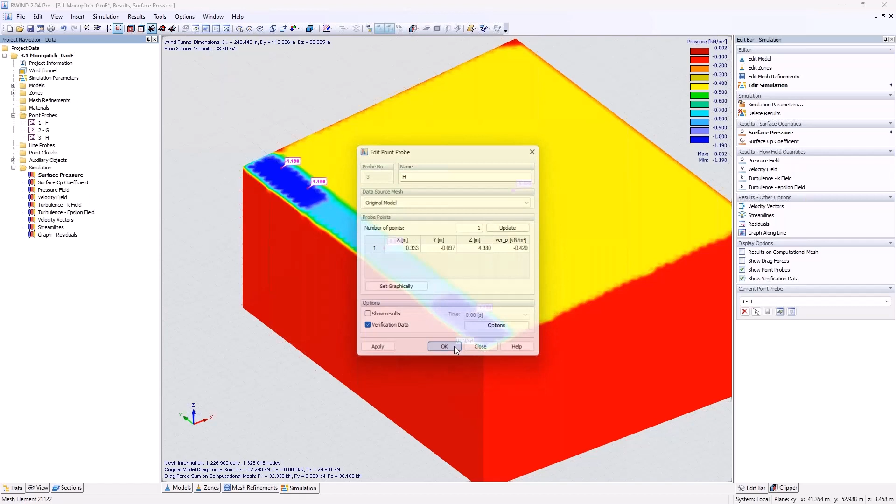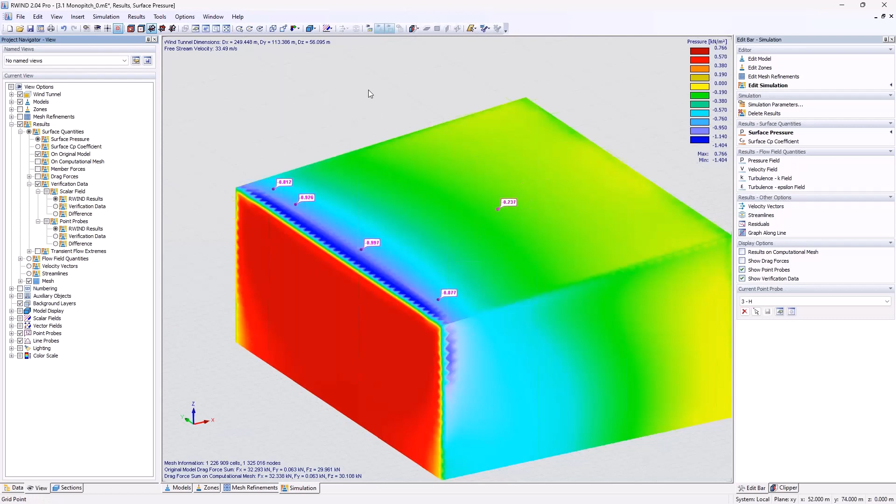So if we did that, we now have a smart graphical representation according to the values. Of course, the standard is offering you, I think, some summed up value amount for the zones, so you would only have yellow, blue, and light blue for the zones, which might differ to the reality values we achieve. And now we can go into the View tab and say, okay, these are our RWIND results. You can see the probes also show the values our RWIND is giving us.

This is the verification data, and now, big drums, we can now also check the difference about it. Let me quickly restrict our zones only to the roof. You can do that usually in the section tab.

And then we can see that the dark blue would most likely be a difference of 0, and the further away we are, we will have a bigger difference. But of course, the standard is not really taking into account maybe a finer determination of an area, so we might have some bigger differences to the standard.

What I did not do is a long calculation. So what I did is having the wind tunnel size recommended, but only a model simplification factor of 2. So this is not the best calculation giving the best results, but some quick results.

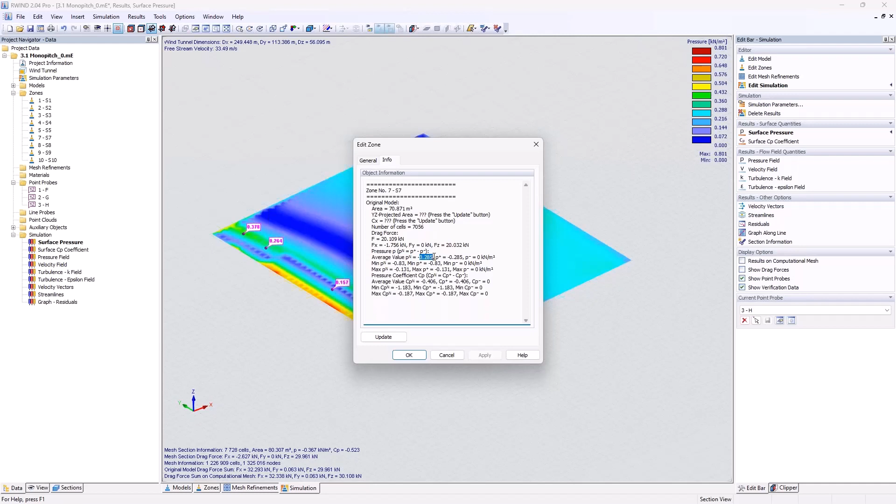And we can see that, well, we are of course away from the standard in certain areas, but you could also try to double click on a zone. So let's, for example, use zone number 7 and get the information about the average values inside the zone in order to double check them as well and compare them to the standard. So this is most likely the biggest new feature we introduced for you in order to compare the stuff with experimental data.

So what you could also do is enter more probes, define more areas, and think about what verification interpolation you are going to choose.

So I was just about to jump into the point probes, but maybe my computer does not like it. Okay, I was most likely even done with this, so let's continue with the presentation. I see I'm a bit ahead in time, but I think this is no problem.

So last but not least, the prospect of today. We of course try to constantly expand our database of verification examples. If you do not know, you can find them in our download area, in the verification example section where you can filter for RWIND and RWIND2. There we provide some validation, for example the latest one, a comparison to a Japanese wind tunnel, where you can see that zones were created and double checked and compared to the standard.

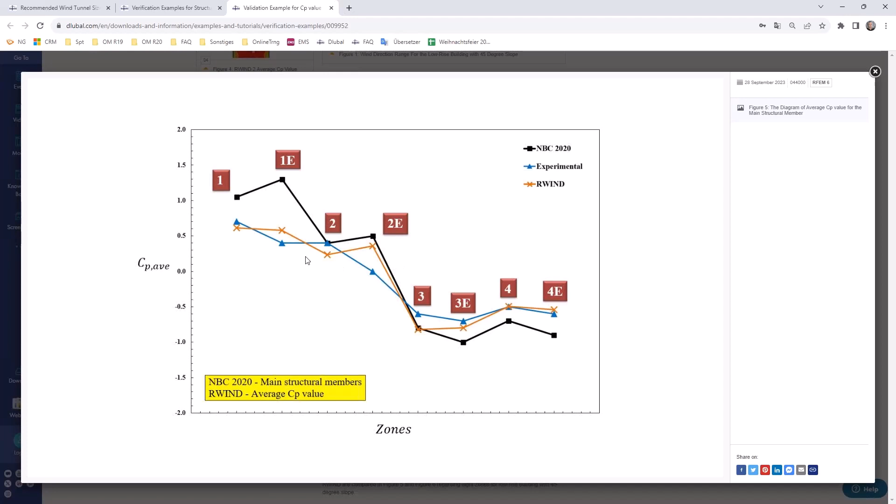Where is the experiment, where is the standard, and where are we? It's not about judging what is the correct result, because nobody really knows what assumptions the standards made in the past. It's most likely just about getting a feeling for whether my CFD model matches reality or not, and maybe I can even get lower values which might be more economical, but still on the safe side.

So you can find all the input values, and if you scroll down there should also be the model to download. So you can gather these models, and if you have a similar model, put them into the tunnel with the settings we used, let them run, and then gather the information you may be curious about.

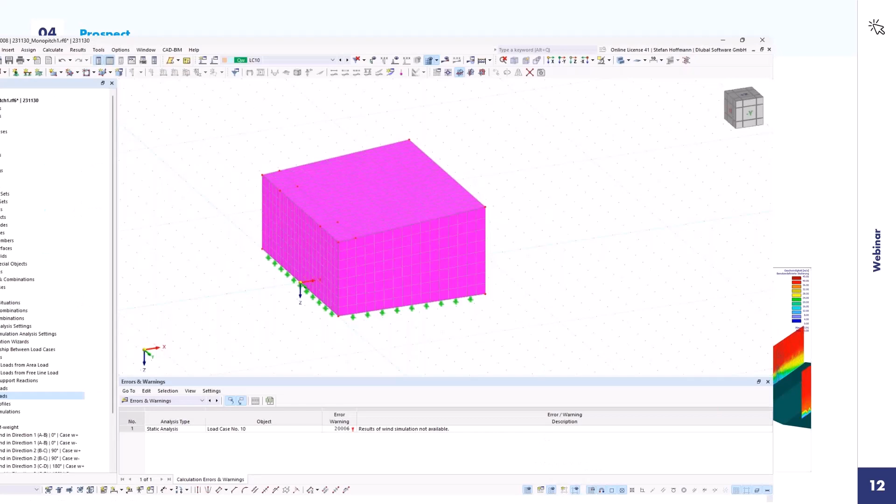What I did not show this time in the webinar is the connection of the results from RWIND to the RFEM GUI. We are going to introduce more so that you can run RWIND as a solver in the background. There is a tab in the wind analysis load case that you can switch to the RWIND results. Currently, I think only the pressure and the CP coefficient are drawn in here to be evaluated.

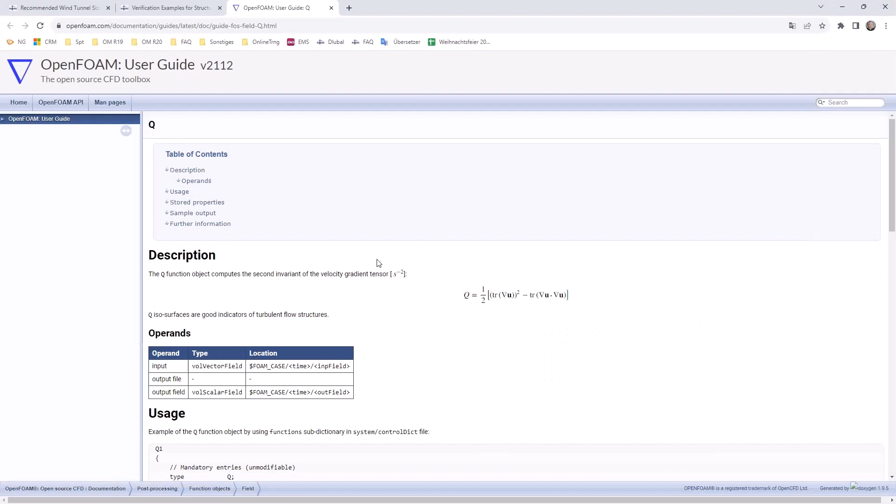We also plan, though it's not fixed, the expansion of the result values as Q-ISO surfaces. I never heard about them yet, but I'm not that scientific a CFD analyst. You can find in the OpenFOAM user guide information about what this vector field is about, and if it's useful for you to evaluate your model, you can check out these results hopefully in an upcoming version.

And last but not least, beside all other planned features, we are also planning to offer more wind tunnel scaling options that can be transferred from the RFEM GUI to the RWIND GUI. All right Andreas, so I'm a bit ahead in time, 5 minutes, but maybe you can close the gap, and I would hand back over to you.

Okay, thank you Stefan for this nice presentation about the current state of our RWIND. We're quite curious if these features will be integrated into the program in the near future.